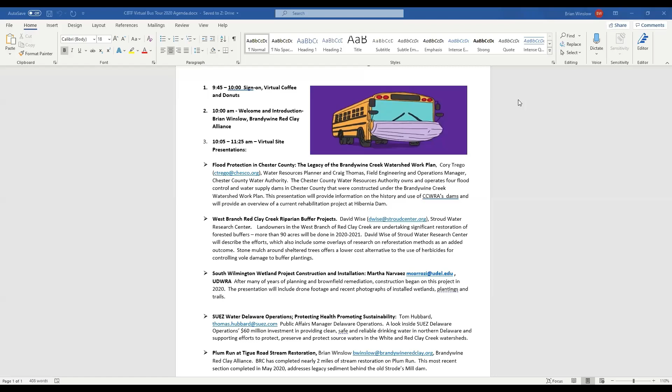Here's our trip today. For our tour, we're down here at the Myrick Conservation Center. We're starting here today. We're going to travel 16 miles with Cory and Craig up to the Hibernia County Park, and we're going to learn about flood control at the Hibernia Dam. After that, we're going to travel with David Wise through the west branch of the Red Clay Creek, looking at riparian watershed plantings, and end up back in Kennett. David Wise from Stroud Water Research will be our presenter.

From there, we're going down to South Wilmington Wetland, a project we've heard about. I went to go see it, and it's hard to see from the road, so Martha's got some aerial footage. This project is actually in the ground now. So it's a teaser. We hope to get out there physically in maybe 2021. From there, we're heading over to Tom's place at SUEZ. That's New Castle, I think, or Newport. And we're going to have a tour of SUEZ.

We need to remind ourselves that so much of the work we do is for drinking water, and that's what resonates with our folks. From there, we're coming up to Plum Run on Tigue Road back in West Chester, and we're going to finish back here so you can get in your cars and commute back home. So we're going to cover 80 miles. Ignore the 2 hours and 35 minutes because this is a magic school bus ride. We're going to do it all in 90 minutes.

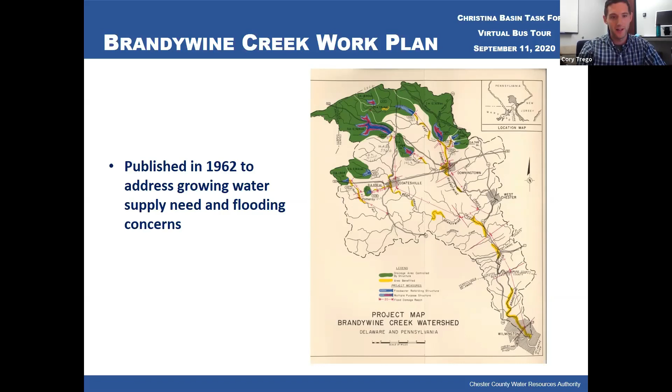Also with the growing population in Chester County and in the broader Brandywine Creek watershed, there were concerns about long-term water supply. They had a couple severe droughts again in the 40s and 50s, and it kind of heightened this awareness that we need to do long-term planning to make sure we have sustainable water supply and then good flood control management for the future.

So the Brandywine Creek Work Plan originally called for the construction of 10 different flood control reservoirs and water supply reservoirs. You can kind of see those highlighted throughout the map here. But ultimately, only 4 of the 10 that were originally planned were constructed, and a 5th one, Hibernia Dam, was constructed at the end of this. It was not originally planned.

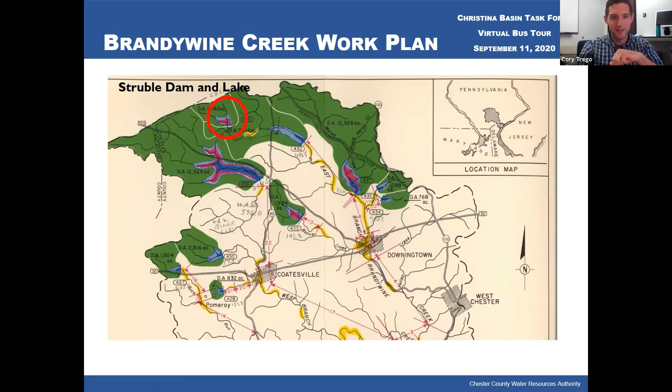So Struble Dam and Lake is owned by CCWRA up in the headwaters of the east branch of the Brandywine. Barneston Dam, east branch of the Brandywine, a little bit further downstream there. Beaver Creek Dam is located on Beaver Creek, which is a tributary to the east branch of the Brandywine. And then Hibernia Dam and Chambers Lake is located on Birch Run, located at Hibernia County Park.

And then Marsh Creek Dam and Lake was also constructed. CCWRA worked with the NRCS to oversee the construction of this dam. However, right now the state, through DCNR, oversees the operation and maintenance of the dam at Marsh Creek State Park.

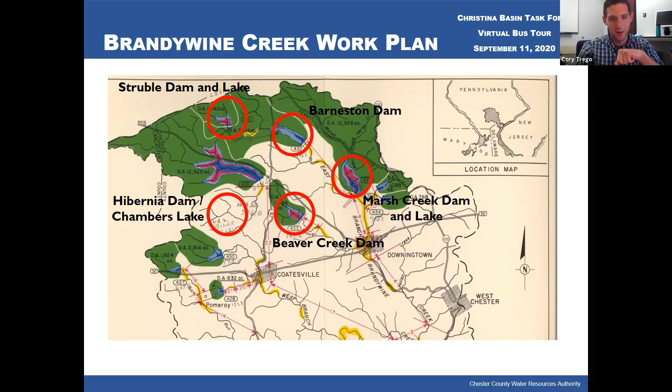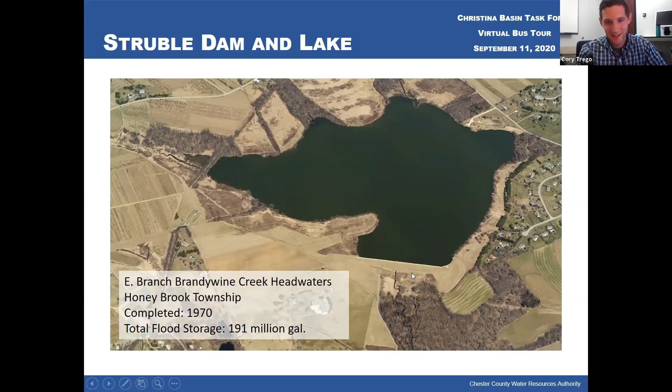So our first dam is going to be Struble Dam and Struble Lake. Struble Lake is about a 160-acre impoundment located behind Struble Dam. You can see the dam down here at the bottom of the screen. Just kind of a good drone image here. You can see the principal spillway, the overflow from the lake comes right through here. The dam breast is across here, and our auxiliary spillway.

So if water rose over 2 feet in elevation in this impoundment, it would flow over this auxiliary spillway. We've never actually had water flow over that auxiliary spillway since the dam was created back in 1970. You can see kind of the principal riser back here. So water is continually flowing over into this riser and outlets down into the headwaters of the east branch of the Brandywine on the downstream end of this dam.

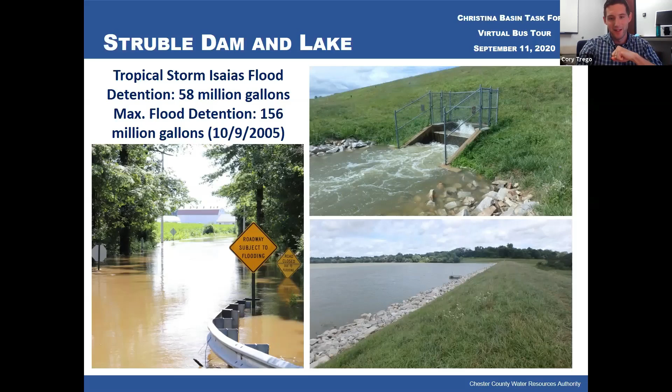As I said, this dam is managed by the Fish and Boat Commission for recreation, but one of its primary purposes was also flood control. So just a month or so ago, we had Tropical Storm Isaias. This dam led to the retention of 58 million gallons of floodwater. But that kind of pales in comparison to October 9th of 2005. The maximum flood detention at this site was 156 million gallons. That's 156 million gallons of floodwater that is prevented from going downstream and flooding communities and roadways downstream of this dam.

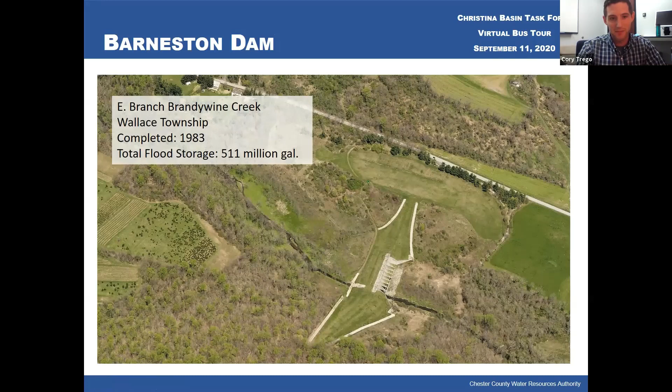Barneston Dam is located in Wallace Township. It's our dam currently only operated as a dry dam, so it only backs up water during a flood situation. Completed in 1983, and it can store 511 million gallons of floodwaters. As you can see right now, basically behind there is a bunch of vegetation growing. But in a flood situation, water backs up because only a certain amount can actually go through that principal spillway.

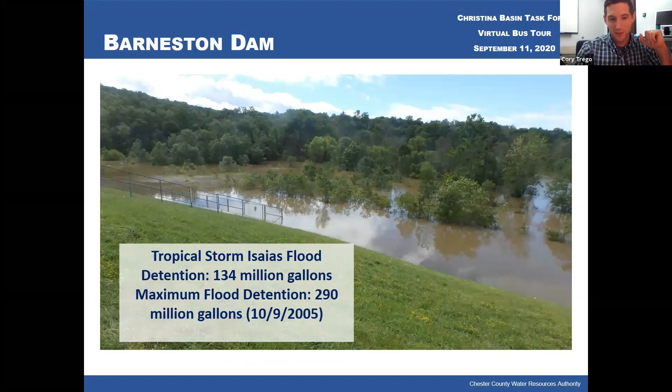Tropical Storm Isaias, we had 134 million gallons that were detained, but back on October 9th of 2005, we had 290 million gallons. We approached that level on May 1st, 2014. We didn't quite get to that level, but you can see how much water is detained behind this dam when you have a flooding event. So again, this is on the east branch of the Brandywine Creek, preventing this water from moving downstream and impacting Downingtown communities down further below.

Our final dam is on Birch Run in the west branch of the Brandywine Creek, located in West Caln Township. This is our most recently completed dam, completed in 1994. It's Hibernia Dam, and then Chambers Lake is a 90-acre impoundment behind it. It has a total flood storage capacity of 257 million gallons.

This dam, there is access for the public. You can get out there, you can recreate on the lake. It's a really beautiful spot throughout the entire year. Tropical Storm Isaias, we had 80 million gallons of floodwaters that were detained behind this dam.

So I'm going to turn this over now to Craig Thomas, and he's going to wrap up with discussing the current rehab project that is going on at Hibernia. So Craig, go ahead and share your screen and take that away.

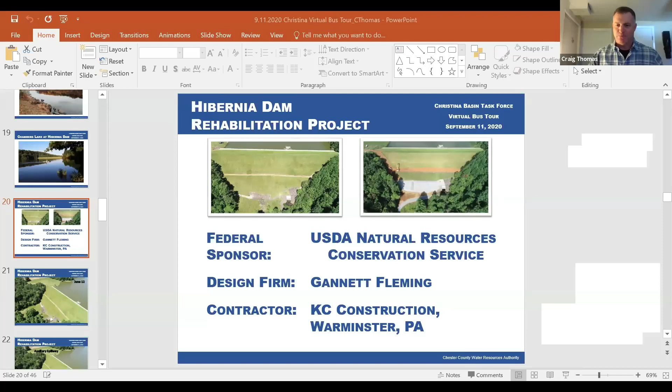And as Cory mentioned, we currently have a rehab project underway at Hibernia Dam at Hibernia County Park up in the Upper West Branch Brandywine Creek Watershed. I wanted to start off, I could take all 5 minutes to talk about our federal sponsor, but we're very fortunate to have worked with the U.S. Department of Agriculture's Natural Resources Conservation Service. They've been wonderful to work with.

We qualified for a grant through their Dams Rehabilitation Program, and that has provided us support for planning, design, and now into construction. And that's including both some financial support as well as technical support and administrative support. So I just wanted to highlight just how wonderful it's been to have USDA Natural Resources Conservation Service as a partner. The design firm for the job is Gannett Fleming, and the construction company is out of Bucks County. It's KC Construction from Warminster, and they've been wonderful to work with as well.

The goals that we had here were to address some items that needed to be resolved so that the dam met modern dam safety standards. Here's a photo of the dam before construction started. This is back in June. And we have here in the foreground, we have the embankment. And as Cory remarked, we have the auxiliary spillway here at Hibernia Dam. And those are the two areas where our work is focused on.

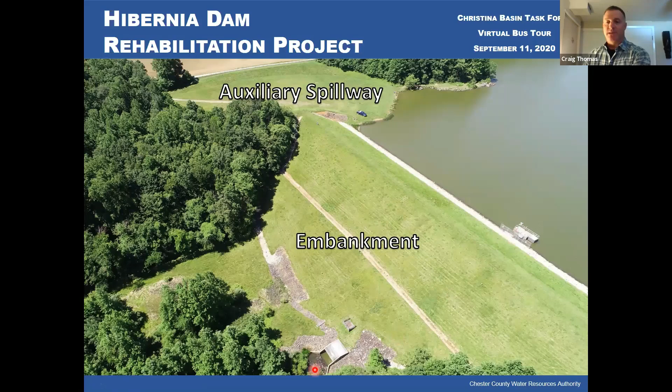Our principal spillway is through this riser outletting in this impact basin. So our principal spillway is here, auxiliary spillway is here, and the embankment is here. The 4 areas that are worked on include the auxiliary spillway and 3 areas here along the embankment.

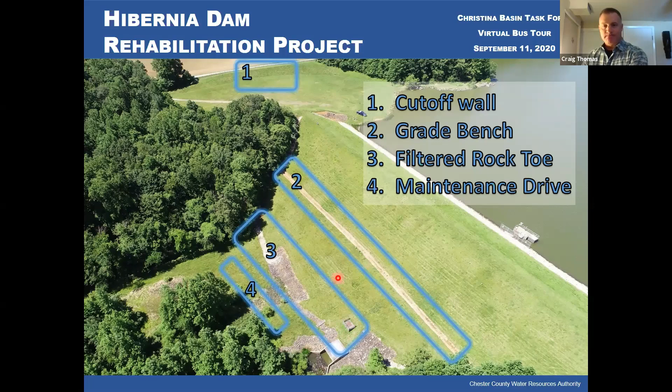And that includes a concrete cutoff wall being built here in the auxiliary spillway, grading of the bench on the downstream slope, installation of a filtered rock toe to improve our drainage at the toe of the dam, and an extension of an existing maintenance drive so that we were able to get equipment over to our impact basin and to our valve vaults. So again, here we are about 2 weeks after the project started. And although you can't see it from this photograph, the dam is basically surrounded on 3 sides by woods and the 4th side by water.

So our contractor came up with a very creative solution to install a temporary haul road down the slope of the dam. We routed this through Pennsylvania DEP and the County Conservation District and the township, and we got approval from all three. And it was a fantastic solution to allow work to continue down in this area. You can also see here in June that we have some excavation underway in the slope and the bit of the control section of our auxiliary spillway.

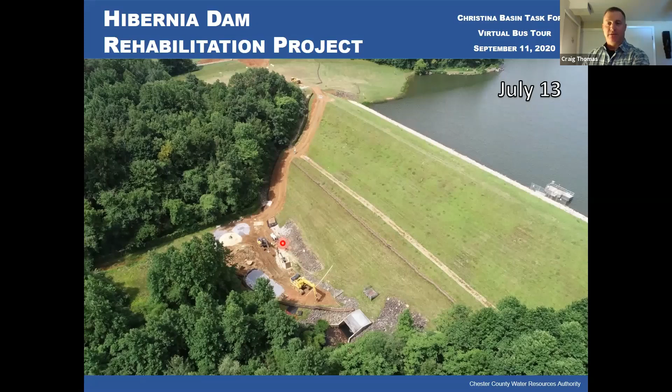Here we are a couple weeks later, and at this point they're working on installing a dewatering system down here at the toe so that they can control water and allow the filter to be installed properly. You can also see some E&S controls being installed, and although slightly off screen, a little more excavation here at the concrete cutoff wall. Here we are into July, and we have the beginnings of our rock filter toe, and I have some close-up photos of that in a moment.

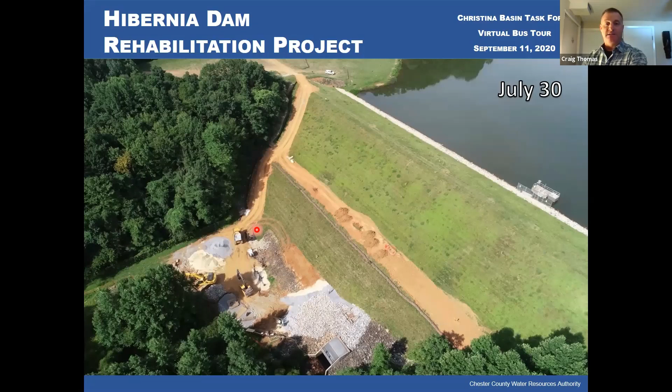The dewatering system is right here. That is in place and operating. That dewatering system used the same materials and the same design as the filter toe. So this actually became an extension of the filter toe. It was left in place when the toe was built. So here we are in August. The dewatering system remains as part of the filter toe as it extends across the toe of the dam. This toe is probably about 250 to 300 feet in length. And you can begin to see our extension of our maintenance drive coming in and grading on the bench.

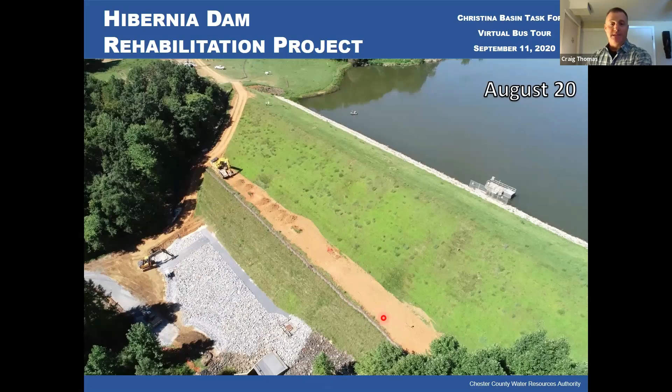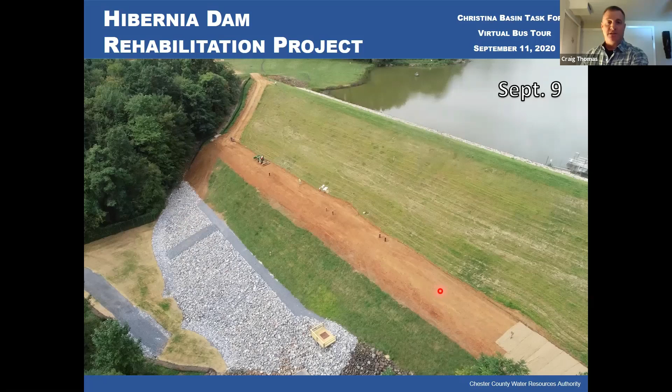And now just to give you some quick shots of the work, this is our cutoff wall. The embankment is in the background, pardon me. The reason for installing this concrete cutoff wall is that we have excellent bedrock, fairly shallow across this control section. However, in this part of the auxiliary spillway, the bedrock was a little deeper, about 6 to 7 feet deeper. So we needed to put in a concrete cutoff wall so that when water flows from the lake downstream, there won't be any problems with erosion cutting back into the auxiliary spillway and causing any kind of breach. So that's the purpose of this.

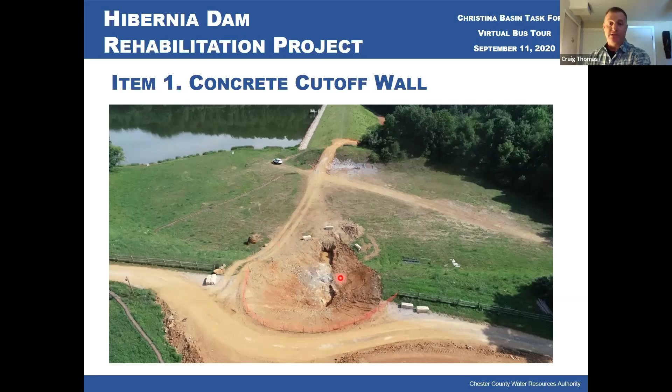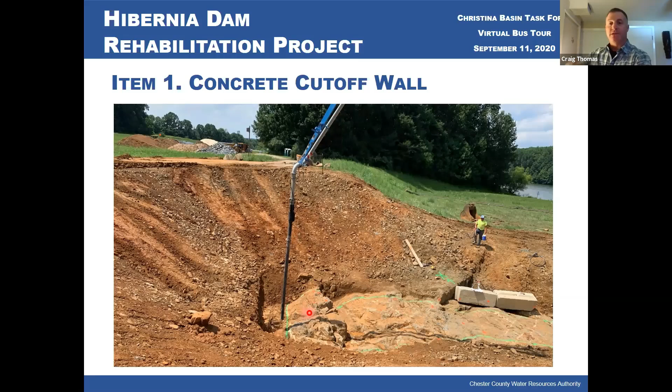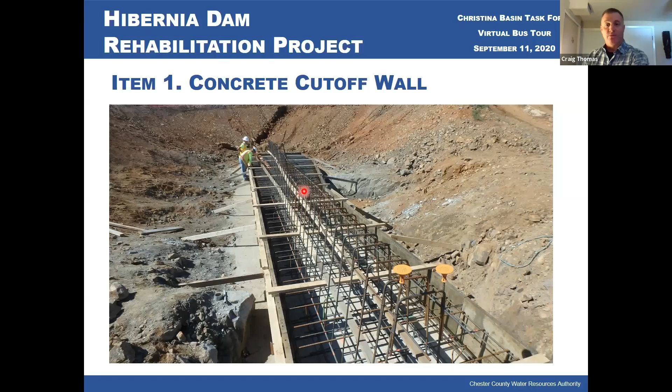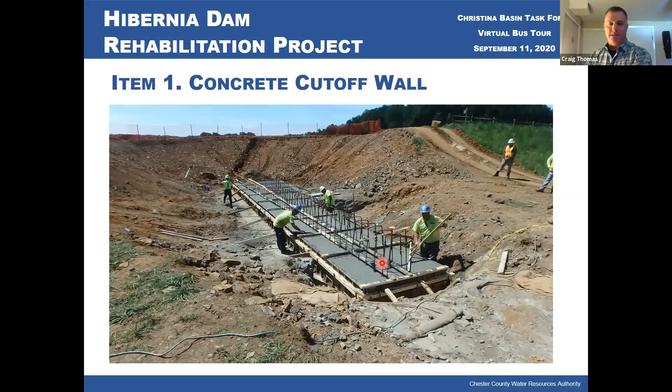So the first thing we did is bring it down to bedrock and clean it up, and then poured in some backfill concrete to provide a level surface for the work. Next was the installation of the footer, and we have about 4 tons of reinforcing steel being installed in this wall and about 135 yards of concrete. So here's the footer being formed, and then they brought in a pumper with a couple of concrete trucks, and they began to pump the concrete in and form the footer. And you can see the guys working there to form the footer up, and some of the reinforcing steel that will make the vertical portion of the wall, which is the next phase.

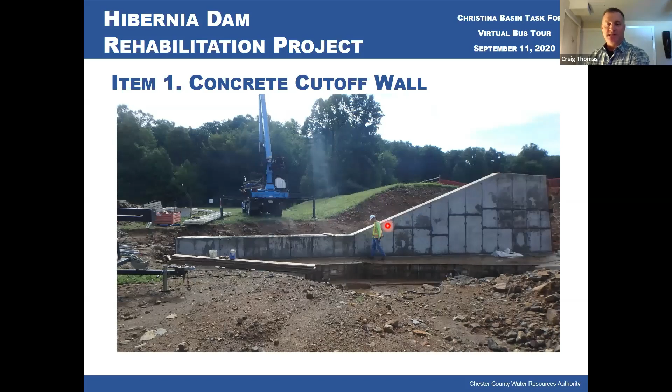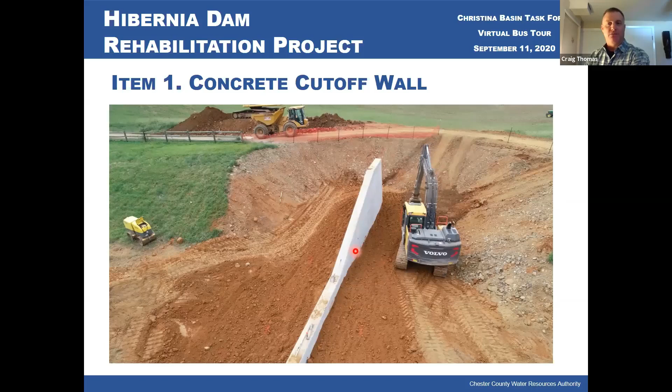So now we have our footer down here at the bottom, and we have the reinforcing steel going up here. You can see this is probably about 15 feet tall, and you can see a form on this wall, and they're going to start putting the form up on this wall. And then the next thing is to pour the concrete in, and now we have a concrete cutoff wall, and this will be in line with the existing geometry of the channel. So at the end of the day, this will all be backfilled in, reseeded, stabilized, and all we'll see at the very top is just the top edge of the concrete cutoff wall. Otherwise, it'll all be buried and basically seamless from the public's point of view.

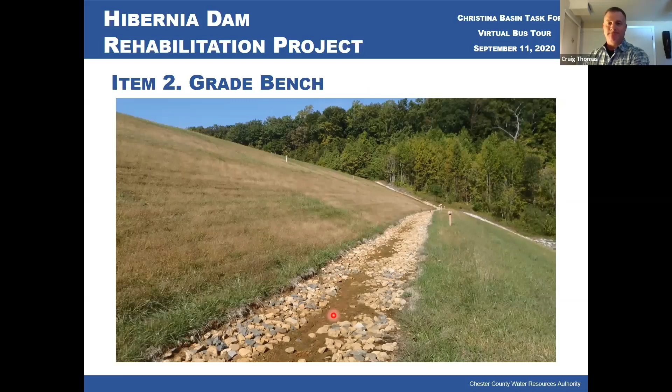The next area is the bench. We used to have a reverse slope on the bench, which caused some ponding. So a minor fix was just to make this a positive drainage. So water will come down the slope, be intercepted before it picks up too much speed, and then sheet flow down into our rock filter toe.

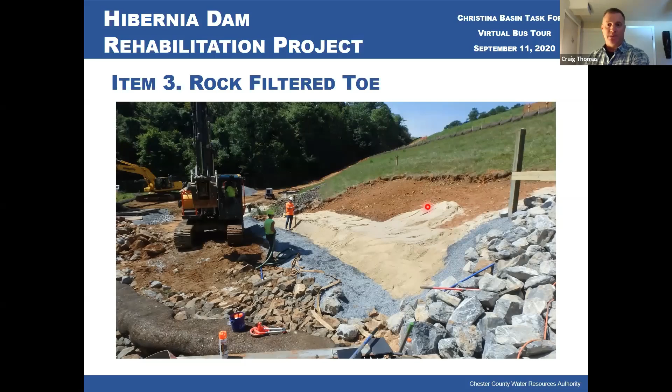This is probably the biggest project of the 4 components. The goal here was to take off about a foot of soil to get rid of all the grass and roots, and then to apply fine drain material and coarse drain material to provide additional drainage of any seepage or any water moving through the dam. We have existing drains, but we wanted to supplement those with this new rock filter toe.

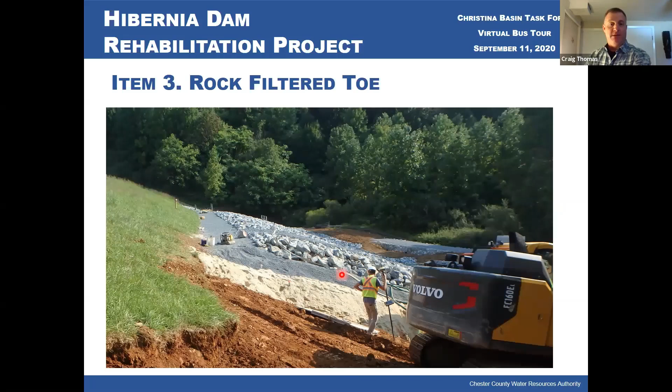So what we have here is 3 zones. The bottom is the fine drainage material, basically sand. It's at least a foot deep. Next is the coarse drain material, and on top of that is R5 riprap to keep everything in place. Compacting everything, multiple tests to make sure everything was done properly.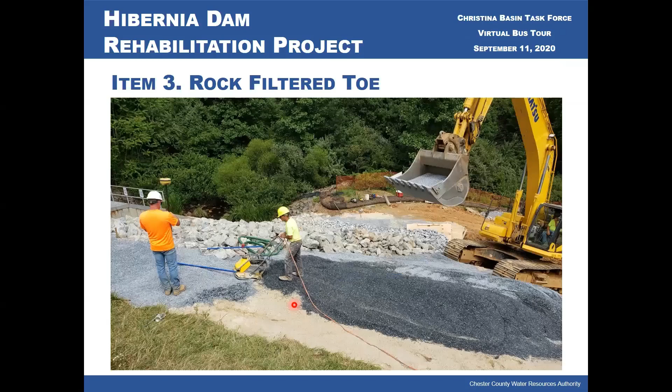I had a question on the permanent seeding, just for quizzical. It looks like a turf, like a ryegrass or something on there, or orchard grass. What would you guys use for the permanent seeding? Yeah, for the dams, we use a mix of a triple ryegrass and a fescue. So the ryegrass will have 3 varieties, 3 species, I guess, and then the fescue will be there. I believe it's an annual rye. So an annual rye to get quick ground cover, and then the fescue for the long term.

Right. Is that maintained like 3 times a year or more than that, or how's it maintained? At Hibernia, we mow it at least 4 times a year. And occasionally, if it's a particularly wet year, we'll mow it a 5th time. All right, cool. Thank you. Yep.

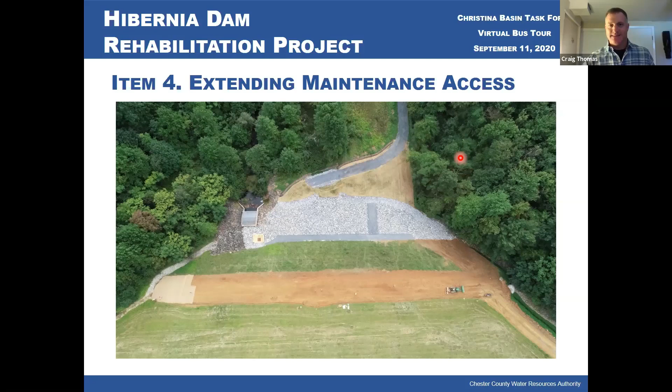I think one advantage of the virtual bus tour is we got to see 5 sites and cover things we would not normally have been able to see over a period of construction.

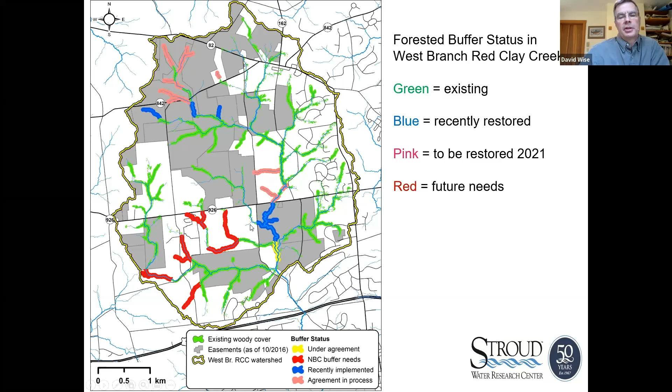The blue areas, that's the areas that we've done just in the last couple of years. One here right below 926. That's about 45 acres of buffers put in there in the last year, including that yellow area that's now installed. The pink areas that you see up here in the northwest and the headwaters and in the central part, that's slated for construction this coming spring of 21. And then you'll see some red highlighted areas. That's future needs, largely with the new Bolton Vet Center that we're hoping to get some participation on. So next.

Just real quick, I don't need to drag you through all the numbers, but just look at the totals at the bottom. It's been really gratifying and humbling to have the kind of landowner buy-in and support. We are putting in gold standard buffers that are more than 100 feet per side on average in some really high-priced real estate. We'll be putting in 92 acres of buffers in these 2 years on about 7.5 miles of stream. So the landowner support and cooperation has been really, really gratifying.

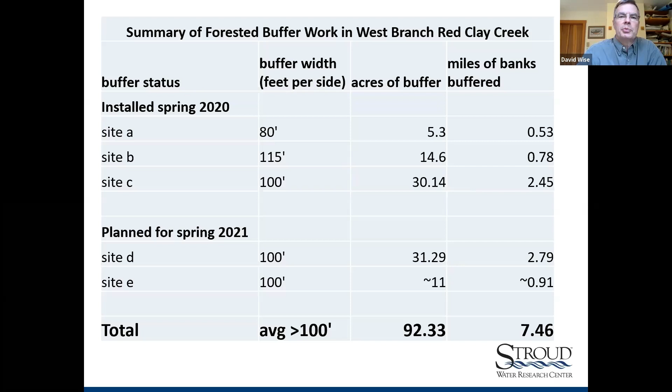Next. Stroud is a research facility, and one of the privileges that I have working there is as we do watershed restoration projects and buffers, we have a chance to overlay some research questions and ask how we can do these projects better. So working at cutting costs, reducing the need for herbicide, and improving success, we put some trials into these West Branch red clay projects that were installed in spring.

First being the idea of using stone mulch as an alternative to herbicide for protecting trees from rodent damage. A second one is testing out a new tree shelter that's on the market, a little bit cheaper. See if we can save some money, see if the thing works as well as it needs to. Use of pressure treated oak stakes. We've had a lot of stake failures that make for an awful lot of maintenance and maintenance cost.

And then we're looking at whether we can reduce our mowing on buffers. We mow 3 times per year for 4 years on most of our buffer projects. And that cost amounts to about half the cost of the overall project, including the installation. So it's a major cost. We want to see if we can reduce that cost. Next.

So a couple of years ago, we started in on a second generation of trials of this idea of stone mulch. The 36-inch herbicide spot has been an industry standard for about 2 decades now as a great way to have success with buffer plantings with tree shelters. We're looking at the use of 2A modified stone. That's a mix of stone sizes from dust up through about 3/4 inch diameter maximum particle size.

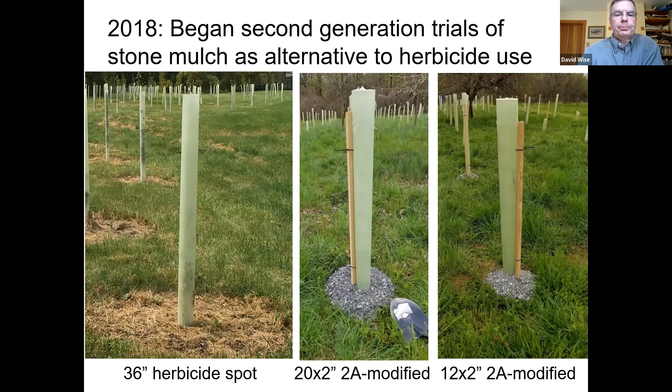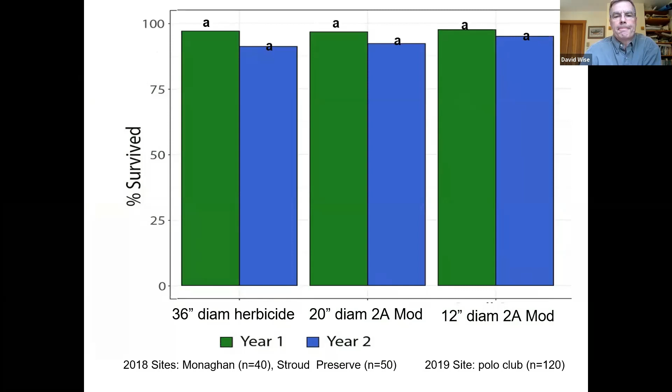So the data for 2 years, just ignore the green, that's year 1 data. Let's look at the blue bars, year 2 data. This is survivorship. And what we saw through 2 years is that there was no statistically significant difference. There's maybe a tendency towards the stone actually having higher survivorship, but nothing statistically significant. Next. In other words, it's working.

Growth-wise, we did see a statistically significant impact there. The stone mulch is not growing the trees quite as fast. You can see the blue bars again. This is 2-year data. It's not a big tail off, but it is statistically significant. That's something to be aware of. In my own opinion, we have many trees that are wrecking themselves on our projects because they're growing too fast, so I'm of the opinion that slowing them down a bit is in their best interest. I'm content with that, but I'll put it out there.

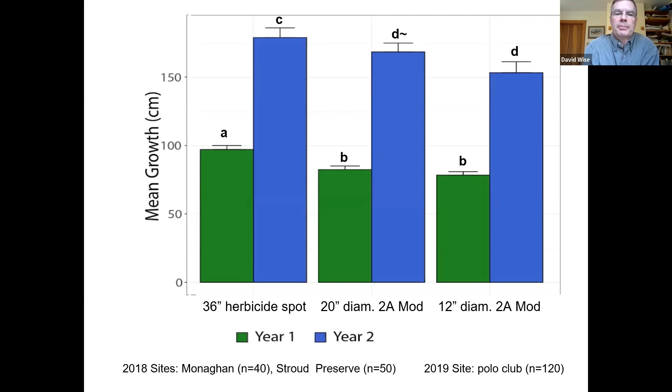It's real. There is a drop off, and that's increased competition for nutrients, moisture, and light. And the stones really are not to suppress the vegetation. There is vegetation that will come up through there, but the stones are very specifically there to keep the voles from chewing up the roots and the stems of the trees and killing them. Next. And it's working.

So what was different in the West Branch is this was our first time that we are working at scale. We've been doing trials, but this is our first deployment at scale. We're doing more than 50 acres of buffers with the stone mulch. And as Murphy's Law would have it, we had our first unintended test of the durability of stone mulch. Some areas of the watershed, it was reported to me that it was more than a 500-year event. Still working on that detail.

I'm happy to report back that of the acres that we had installed to that point, only about 5% were harmed. The stone was washed away. Most of it stayed in place, so that was some good news. We'll also be testing this stone mulch idea in the West Branch on areas with reed canary grass, which is a very tall, very highly competitive, very aggressive grass that can be a real problem for establishing trees. So we'll give it the acid test. Next.

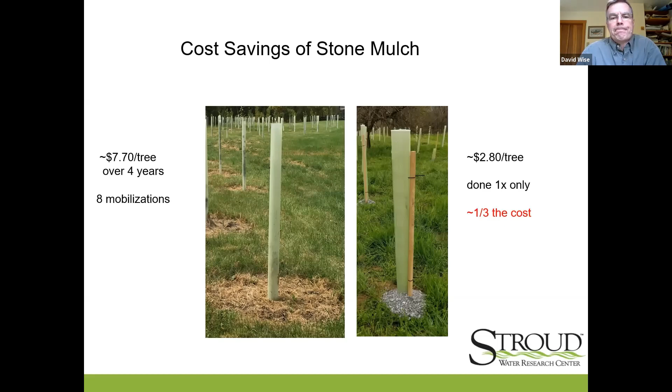We also are testing some tree shelters. The Suregreen, the far right, is a new shelter that's on the market. I have tested shelters now for a decade and a half. I believe it's probably the holy grail of riparian buffer work, because I've yet to find any statistically significant differences among the leading shelter types in terms of performance.

And maybe that's understandable given that in these high growth environments, the trees are only in those tubes for a season, maybe 2 seasons for the slow growers. So it just doesn't seem to be having an enormous effect on growth rate in the longer term. We do think there's some cost savings to be had. Suregreen is a bit cheaper. Next.

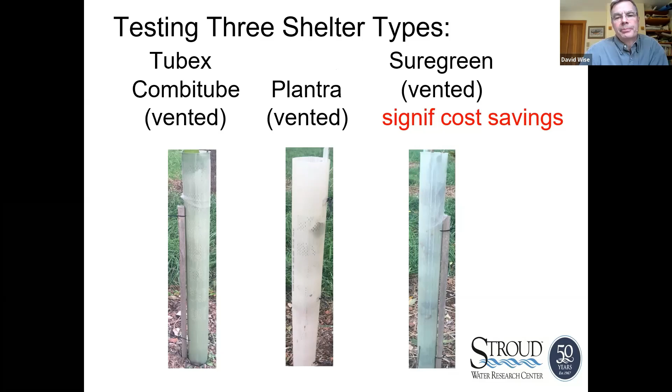And then switching gears from buffers to working with farmers who are doing cropping operations in the watershed. Jamie Hicks works an awful lot of the land in the West Branch of the Red Clay. We've worked with Jamie to help incent him and enable him to both put in new cover crops on additional acres and to get his cover crops in earlier by supporting him with some equipment purchases. So we're working on about 18 parcels in the watershed on almost 350 acres of land. Next.

And let's do the next slide, please. Okay. Took a little long, some big photos there, sorry.

So why the interest in no-till and soil health? We've got farmers where we've tested infiltration rates on older practices, 20 years of cover crops and no-till. And the infiltration rate can be 3 to 5 times faster than conventionally tilled ground. That has enormous impacts. You know, we will need fewer Hibernia dams if all of our cropland is infiltrating 3 to 5 times faster. So reduced runoff, reduced flooding, reduced erosion, healthier streams. Next.

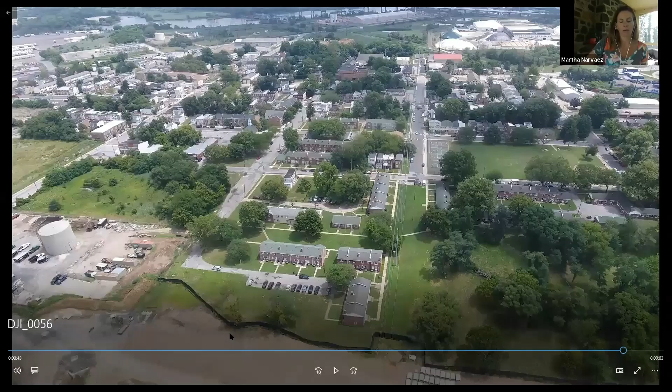Martha, I can't see it. I don't know if other people can. This is Andrew. Okay. Let me stop sharing and then I'll reshare this. Sorry about that. Okay. Let's try this again. Can you see that now? Yes. Okay, here we go. There you go. Thank you, Andrew.

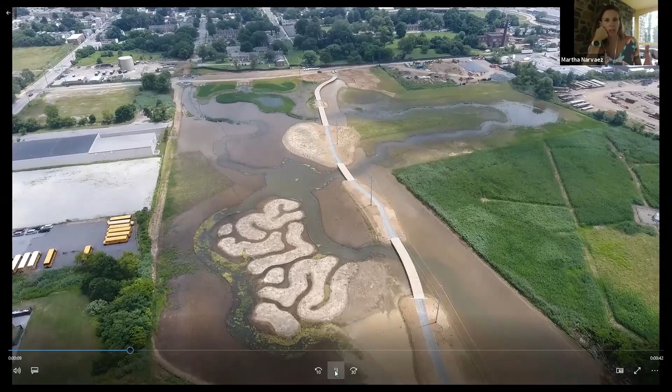So that's the boardwalk that's been put in place, obviously. And like I said, this is coming in from Walnut Street. And then in a bit, you'll see the Christina River in the background.

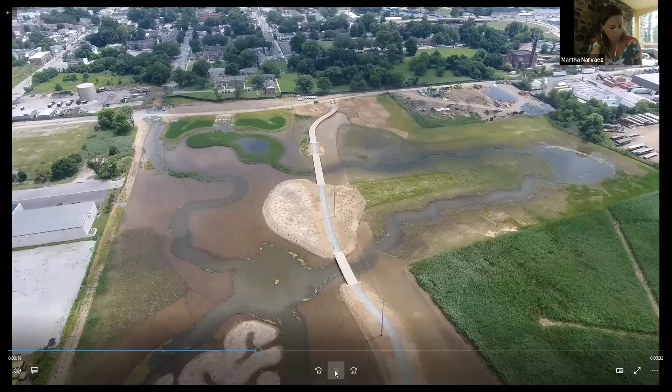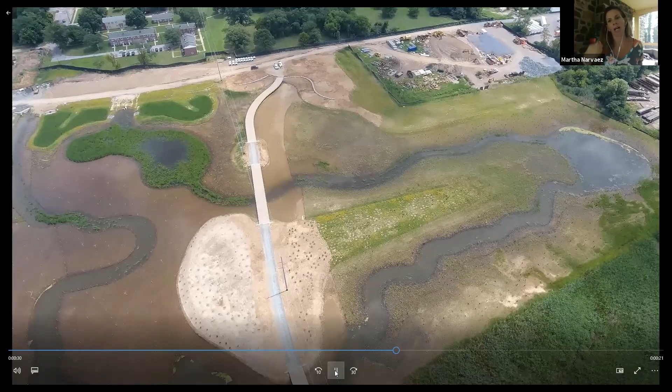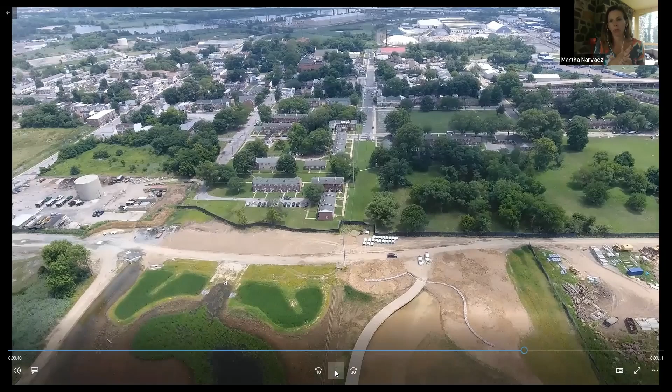So the idea for this project is to concentrate the water in this wetland area, and so pulling it out from the community. The community experiences flooding in their basements. You can't walk in the streets. And it's not just on big rainstorms. It's really any rainstorm they experience flooding. So the idea is that this will retain the flooding. So I'm going to show you one more thing.

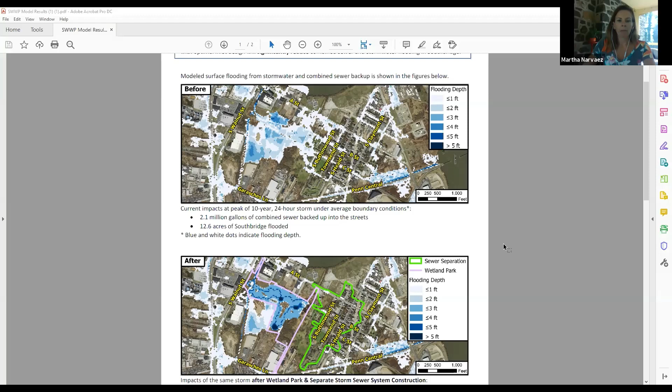And then you move down to the second modeling piece, where it's showing you the impacts of the same storm after the wetland park and separate storm sewer system is constructed. And the depths are much greater, as you see, but that is going to be contained within that wetland park that they've created. And there's a 2.1 million gallon reduction in combined sewer backup, which is a 99.9% improvement. And there's a 12.1 acre decrease in surface flooding, which is a 96% improvement.

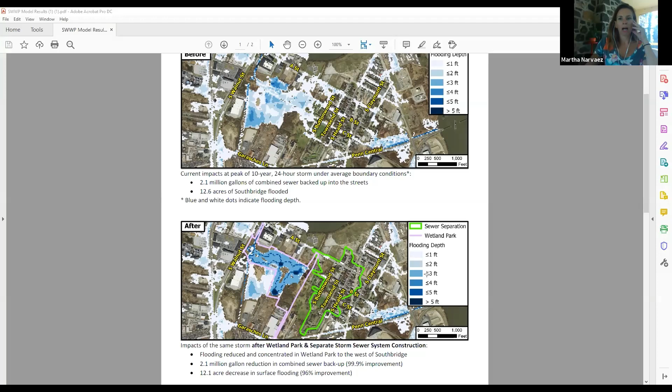The current status is that it is almost complete according to RK&K. And so I'm imagining that they have some remaining planting and stuff to do over the fall. And then I just wanted to make a small note that the city of Wilmington won the government award from the Water Resources Association of the Delaware River Basin for this project. It was supposed to be presented this spring, but obviously there wasn't an event.

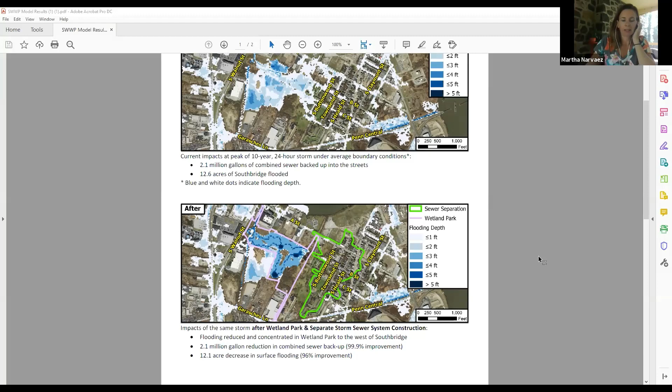But the city has received several awards. They also received an award from the Coalition for the Delaware River Watershed as well. So this project is really impressive. A lot of time and money has gone into it. And so I imagine if you're able to get down into Wilmington the next couple months and take a look, it's definitely something worth visiting.

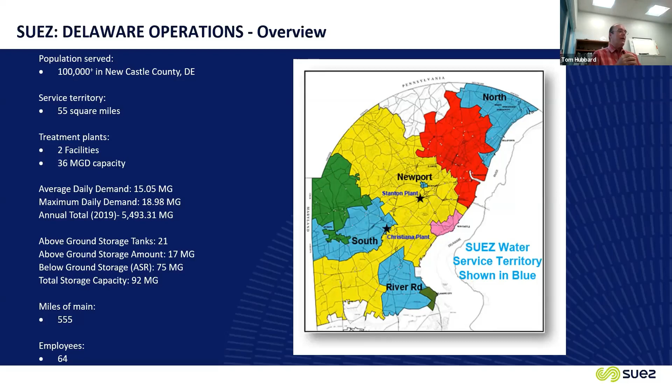And speaking of that pipe, as some folks on this call know and some don't, the American Society of Civil Engineers and the EPA say that it's about a $1 trillion issue in our nation. Every 2 minutes somewhere in this country, there's a water main break because of the aging infrastructure. And we were hopeful 3 years ago there were supposed to be infrastructure bills and there weren't. So how is that pipe being replaced? Well, we put about $26 million in the last 4 years in replacing delivery pipes.

Like many other water providers in this country, a lot of pipe was put in around the turn of the last century. A lot of pipe was put in post-World War II with the housing boom, and that's all coming to a point where it's at the end of its useful lifespan. And we've tripled our investments in recent years to try to keep pace with the aging of the infrastructure. And we can go to the next slide, Brian, if we would.

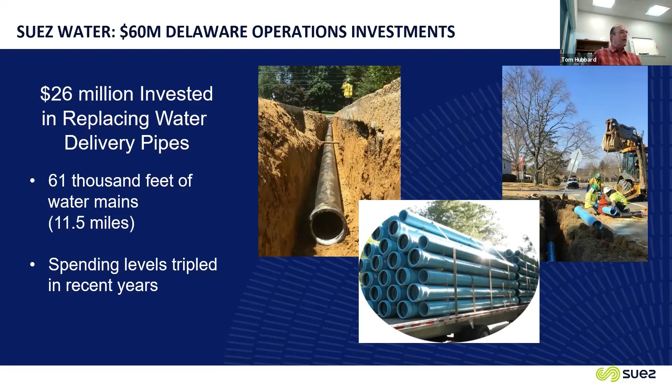So the biggest project in the last year in the watershed and at SUEZ Water Delaware is about $20 million being invested there at our Stanton Water Treatment Plant. The Stanton Water Treatment Plant is our 30 million gallon rated plant. And it's again in Stanton, Delaware, just outside Newport, Delaware, south of Wilmington.

And we constructed two 2 million gallon treated water storage tanks on site. That's a 5-fold increase from what we had before. We also installed a 6,000 square foot pumping facility with brand new pumps that can do 24 million gallons of drinking water a day pushed out into the system that I described, 55 square miles of it.

A lot of the pumps that were in the plant, when they were first purchased, were state of the art, but they're now at the end of their lifespan. And with the new technologies, we're able to reduce our carbon footprint, the equivalent of removing about 120 cars from the road every day by putting in the new pumps, not to mention the huge jump in reliability.

And we were very hamstrung here. I mean, the plant is amazing. 45 minutes is all it takes from us pulling water in from the Red and White Clay Creeks to turning it into drinking water and pushing it out to the 100,000 people that we serve.

I think it's amazing. I give our treatment plant people a lot of props because, you know, when you pull water from a reservoir, I say it's like riding a pony at the Wilmington Flower Market, okay? If you're pulling water from the Red and White Clay Creeks, it's like riding a bucking bronco at the rodeo in Woodstown, literally. I mean, the CFS can go from 100 to 3,000. We saw that. The turbidity, the amount of suspended particulates, can go 10, 20 times up, literally.

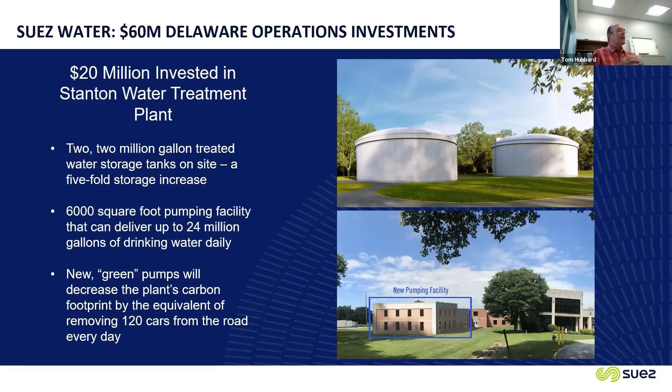I won't bore you any further. I've become somewhat of a water geek and a water nerd over the 14 years I've been here.

So one of the other things that we're doing and investing heavily in is technology. When I first started here, gosh, and even as recently as maybe 10 or 8 years ago, we were reading our customers' meters once every 90 days. That's amazing, once every 90 days.

We are installing advanced metering infrastructure right now, which basically sends a signal from the meter at everybody's house to an antenna on our water towers. There's 4 of them throughout our system, that information comes to us, and then we can provide it back to the customer. And they will be able to get hourly updates on their water usage. And this is a 5-year program. Very expensive over 5 years, but it's an amazing use of technology.

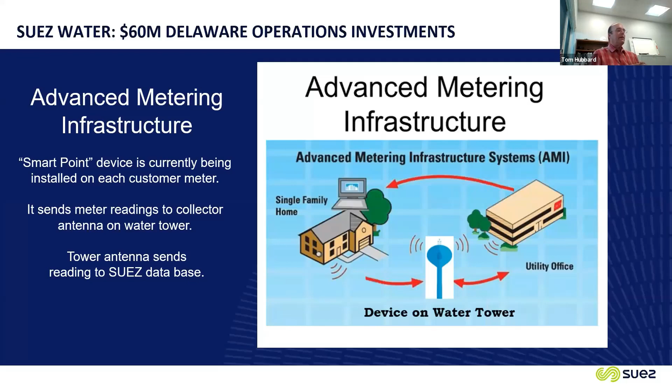And let's go to the next slide, and we'll talk about some of the benefits, because it benefits the customers in a number of ways, and it benefits the environment in a number of ways too. The customers will get their hourly usage readings. Remember, 90 days down to 1 hour. That's amazing to me in a decade. Shows how much change we're going through. Also, very early leak detection, because people may not know they have a leak, and it's amazing how fast a running toilet can make you pay $1,000.

Literally, I had to do it. It also helps the customers measure their savings from water conservation efforts they might be putting into place. You know, we found that if somebody gets some devices and puts them on and they could see a change, it really increases their likelihood to continue to care about it and continue to do it. If they are not going to see a change for 3 months, they may not even remember they put the thing on, right? So that's a huge, I think, environmental benefit.

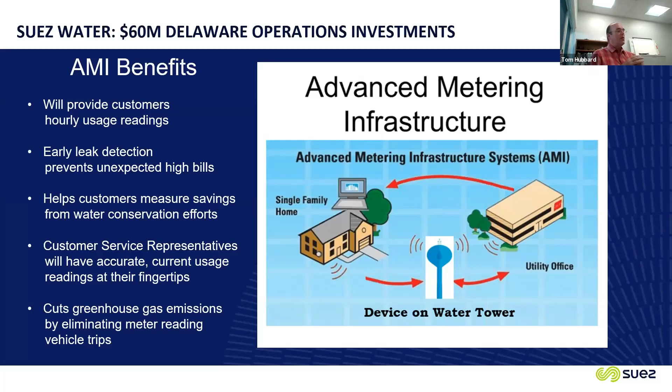Also, our customer service reps can have the data right at their fingertips, and greenhouse gas emissions are also reduced because we don't have to roll trucks. We will not have to roll. Right now, we do remote meter reading with trucks that are able to pick up in 1 day what it used to take about 3 weeks to read electronically. This is, again, electronic reading, but it's going to all be continuous and perpetual and seamless, and we don't have to roll any trucks, no gas, no emissions. So we move on to the next slide.

So up north of Wilmington, we built the first new ground storage tank in 50 years. The Delawareans on the call will probably know where the Pepsi plant is on Governor Printz Boulevard, Lea Boulevard, in that area. There was a 20 million gallon reservoir there that we inherited that was built by the Pennsylvania Railroad. It was built to provide water for the steam engines.

And quite frankly, a lot of today's drinking water treatment plants on the East Coast previously were used as water treatment plants for railroad travel, for the steam engines. The farther you can push the water, the farther you can push the trains. When steam went the way of the dinosaurs, they became drinking water plants and provided fuel for commercial, industrial, and residential development. So the Edgemoor Reservoir was very problematic, 20 million gallons in the water, but we really couldn't use it because we didn't have the kind of pumping capacity. There was no downward pressure.

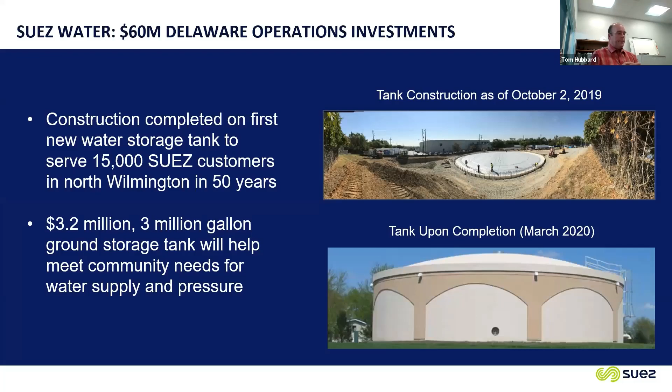Most folks probably recall that the reason you have above ground water tanks, especially the elevated ones, is to give you water pressure at your house. You have millions of gallons of water, hundreds of feet up in the air in these tanks. The downward gravitational pressure is what pushes the water to your house, gives you your water pressure, and is why you have water when the power's out. So this tank is about a 3 million gallon tank. It cost a little over $3 million to build. We were able to decommission the reservoir and put this in place to better serve the customers in our North Wilmington system. Next slide, if you would, Brian.

So talking about our elevated storage tanks, I think I mentioned at the beginning, we're up to 21 of them. This was a presentation I put together near the end of last year, and now that the 2 tanks at our treatment plant and that tank up in Edgemoor have come into service, and another one in another location, we have 21. And we do utilize our own advanced services division of SUEZ to have contracts with them to maintain these. Every 20 years, these are multi-million dollar assets, right?

I call them silent field giants. They stand in communities and they just do what they do. And after a while, people forget they're even there. But without them, you turn the tap on and it wouldn't come out. So they have to be maintained. They have to be updated, again, like the Hibernia Dam, for modern safety, right? OSHA requirements and so forth. So we have a contract that does all of our tanks over a period of years.

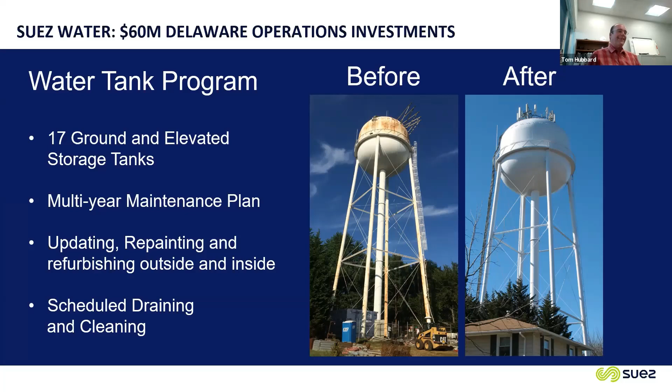We just finished probably the most viewed tank that we own, the Tri-State Mall tank on I-95 when you go north or south. It's been refurbished, and it's a really beautiful sight now. It no longer says Tri-State Mall because, quite frankly, there isn't much of a Tri-State Mall anymore, but we'll go there later. Okay, next slide if you would.

So turning to the sort of environmental portions, this is probably the most rewarding work I do for me personally at SUEZ. One of our four SUEZ core missions listed in our values is environmental concern and stewardship. Most folks on here are familiar with our work with the White Clay Creek watershed. Obviously, we focused on the Red and the White Clay first and most, because that's the source of water we use to serve our customers. And then we sort of broadened it out from there.

The Brandywine Red Clay Alliance, we've had a long and very fruitful and positive relationship, a number of projects, both in the White and the Red Clay, Delaware Nature Society, PDE, Christina Conservancy, and we had a watershed control plan in place for 5 years. We're still sort of doing that plan, but it's more of a maintenance function now to reduce a particular type of microorganism, and we've attained those levels, but we're continuing to do projects as well. So we can go on to the next slide.

One of the ones that I have the most fun with is the partnership with the Delaware Estuary's freshwater mussel restoration effort. In 1933, the first predecessor company of what's now SUEZ in Delaware started. It was Wilmington Suburban Water Company, and it started in the Bellevue area, using the 80 million gallons of water that rushed into the former quarry on Philadelphia Pike, just north of Bellevue State Park. That's how most quarries die. They hit groundwater and they run. And so that was utilized as the very first source of water for the very first customers of what is today SUEZ Water Delaware operations.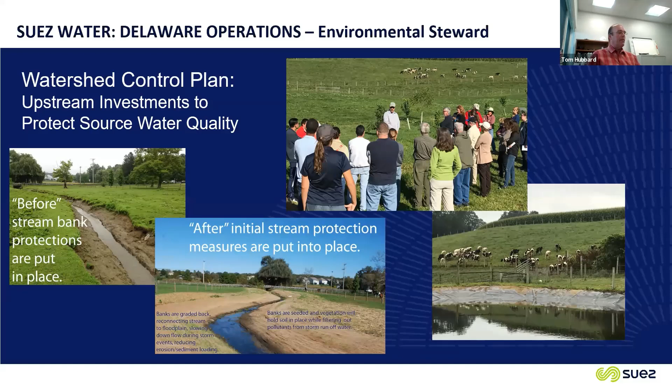And one of the things that I worked out with the DNS folks is we were very pleased to be able to provide funding to erect permanent environmental and conservation signage down at the DuPont Environmental Education Center, which I'm also very pleased to say is served by SUEZ. SUEZ Water serves the water at the Environmental Education Center, because Wilmington could not get the railroad's permission to put their pipes through the railroad line. So we have water mains on that side that are not really for residential or commercial use, but we were able to tap into them and provide water so that building could be built and open and serve 60,000 people before the Markell Trail. I'm not sure what the numbers are now, but it's great to be a partner there as well. We can go on the next slide, if you would.

And there's a financial benefit. I know this is mostly an environmental call, but most people don't realize the water companies own a lot of ground.

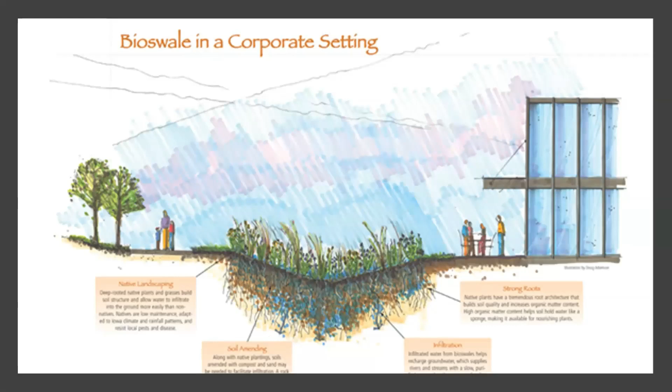The swale has opportunity for infiltration, slow the water down. We did soil amendment. In our case, we used sand and mulch. We want to encourage native plants that have strong roots to hold that soil. So the grasses that were there really weren't doing the job. And so we came up with a plan.

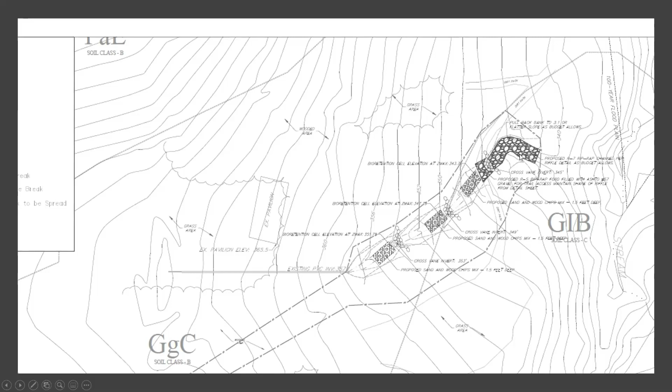And so here's the slope here that's giving the water. Here's that detention basin, and here's where that pipe comes out. So basically, it's 3 step pools that feed one another. And these step pools, the idea is to slow the water down and collect water for small rain events like we had yesterday, and eventually release them into a rock swale where there was steep erosion into the stream.

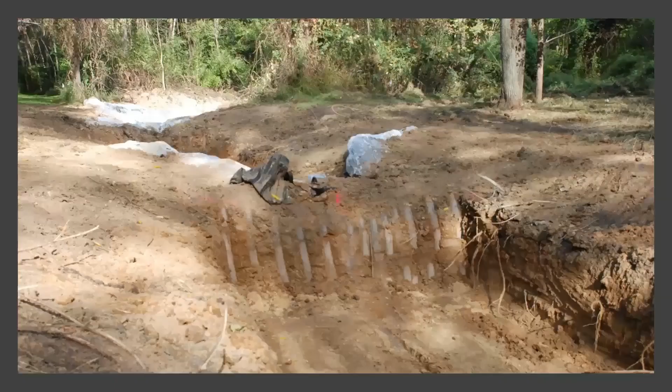And so we brought on Flyway Excavating, and the first thing they started doing was to get the grades right and start to build that swale right behind the barn. This was done last September, so almost a year ago during this construction. The actual cells are 4 feet wide by almost 4 feet deep by 8 feet long. So pretty significant swales, 3 of them.

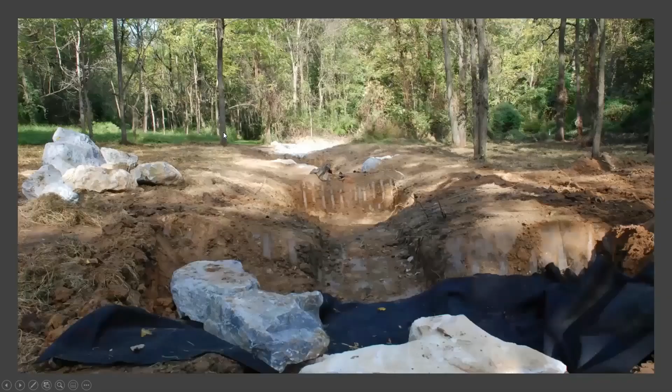This is more or less a rock vane like you would put in a stream. So this is looking downstream and the water rolls over the rock. This rock gives a surface that the water can flow over without getting the knickpoint and backwards erosion. So another way to control that fast-moving water. Here's another view. Geotextile fabric goes under those large rocks.

This is basin number 2, I think. There's another basin here. Another view. This is actually the bottom basin. We had a trail to cross the area, so we came up with an innovative idea of basically a ford that allows the water to go over the trail, and we could still keep our trail there without building an elaborate bridge. So cell number 1, cell number 2, cell number 3.

This is what it looked like at the beginning of October last year. So fully blanketed with erosion blanket, and we used Ernst Conservation Seed mixes. So we used a grass shade mix in here that, given the weather we've had, has grown in amazingly well. But this is the ford crossing. So this has heavy rock underneath with the lighter stone.

One maintenance issue is this stone does wash away in lighter storms. It really serves to have a good walking surface so people don't have crevices. So we do have to occasionally replenish the light 2A stone, but the heavy stone remains at the bottom.

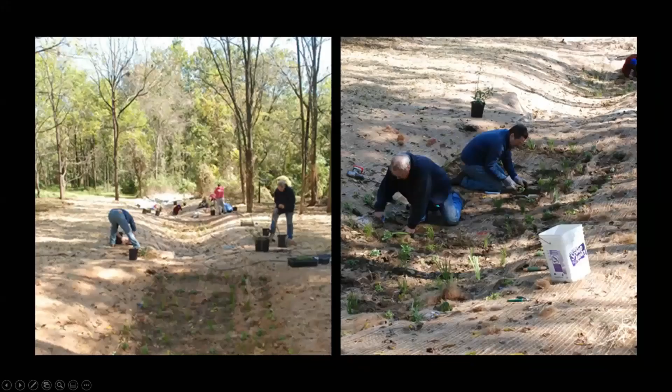On October 4th last year, we had our volunteer work day, and you could see we took the cells and we planted 450 conservation plugs, facultative wetland plants from North Creek, 6 different varieties, and volunteers were there. There's Andrew Holmesy. So he was with us. Andrew's one of our board members as well.

So we planted those, and this is what it looked like on August 4th when Tropical Storm Isaias came. So I was here, and I'm going to try and play you a video of what it looked like. So I decided to go out in the rain and take a look at what's happening. So this is, I believe, the bottom cell. Let's see if this video is going to play. So this is me walking you through a rain event at the bioretention. So let's see what goes here.

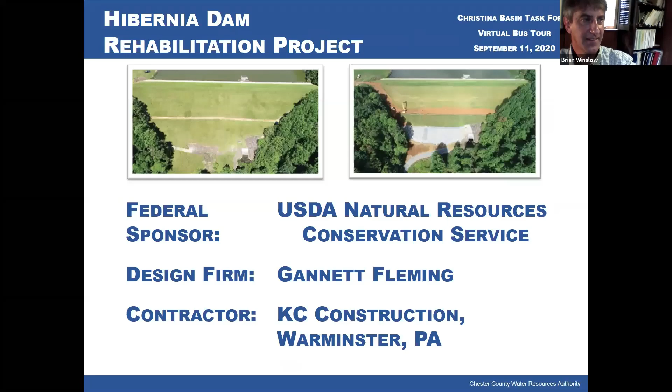Oh my Lord, North Wilmington clay. All right, here we go. And now I'm not hearing it. Yeah. Can't see it. Do we have audio? Neither one. All right, I'll give it one more shot, and then after that, we'll just move on, okay? I'll start singing in the rain in a moment. If it doesn't come up, that'll get us to move on. I'll tell you one thing, I got really wet doing that. All right, one last try here. Hibernia Dam, where did that come from?

Today is August 4th, and we're inspecting a bio-swale that was installed about 10 months ago here at the Brandywine Red Clay Myrick Center behind the Browning Barn. This area takes stormwater from the hillside behind us, a couple of acres of stormwater, and it was making a gully here before it enters a tributary to the Brandywine. And what we installed are 3 step pools that are designed to retain the water for infiltration and during a storm event allow the water to go through.

So the water comes from a small detention basin, and you can see we're getting probably over 2 inches an hour of rain right now, and it comes quite forcefully out of the pipe. And yet, through sheet flow and the vegetation, the water continues to run clear, and it gets to the first bio basin, which is now growing nicely with wetland plants, including some cardinal flower. And from here, it flows over a rock structure into the next basin, where in smaller rain, it's infiltrating the entire way.